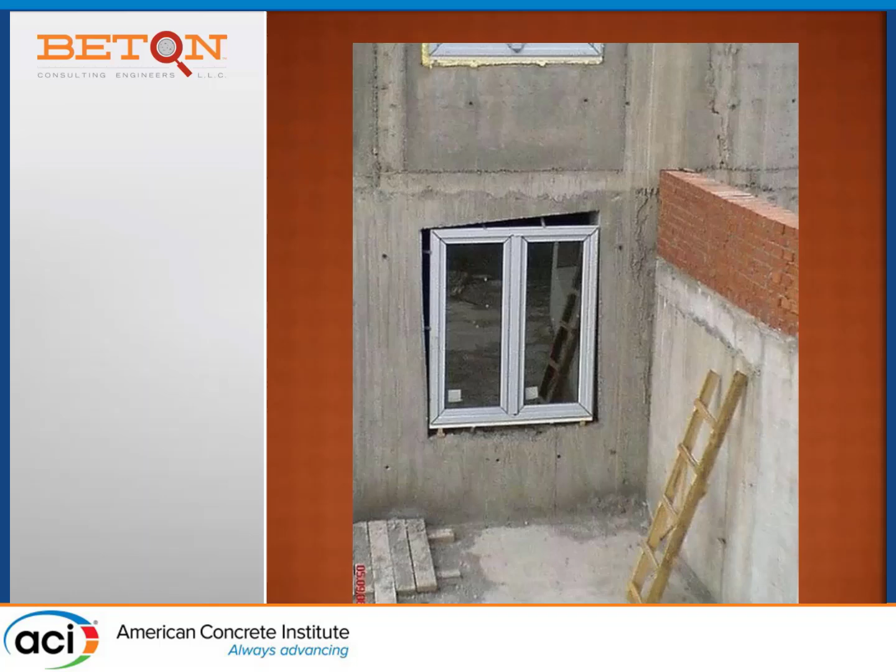And concrete construction is an interesting thing, right? Because we can fix a lot of problems in the field. This is why I no longer run my contracting business, right? Because they make the windows the wrong shape. So we live in a pretty simple world.

And the simple world that we live in is based on specifications. A specification is part of the contract documents. It comes together and clearly tells us as the contractor, and communicates from the designer to the installer, exactly what all of the requirements for the construction are.

We then ask for a submittal. The main purpose of the submittal is to make sure that the contractor has read the specification and has responded to it. It also gives us something to do in a couple of weeks, which is always good.

And then a testing lab is hired to check, to make sure that what is being provided to the site is in fact what was in the submittal. And there are no problems, and so everything is great, and I will talk to you next year, right? Works just like that.

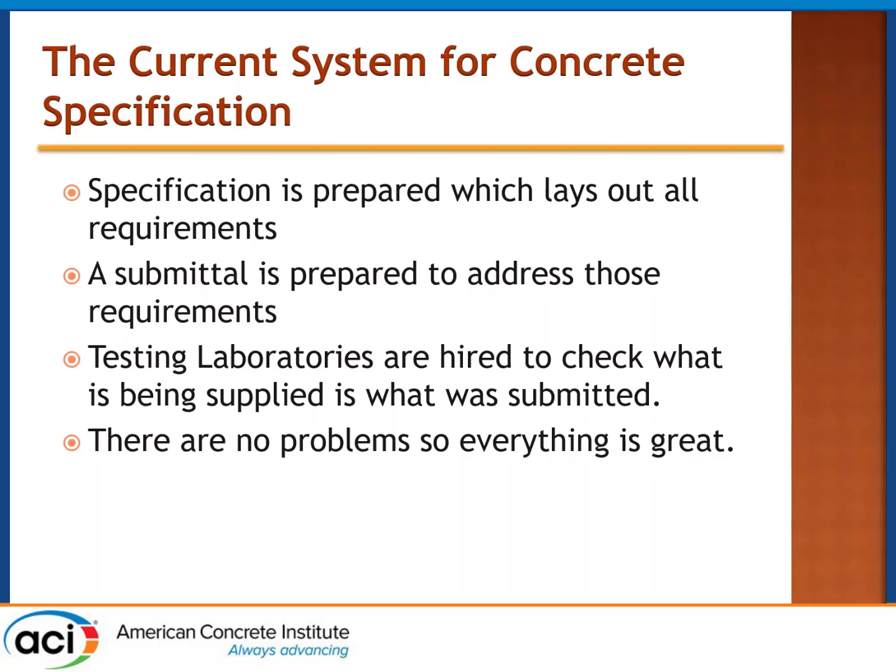We have an interesting situation where, as things are changing, we are getting a lot of new terms that some of us might not be familiar with. One of them is the global warming potential, GWP, expressed as a carbon dioxide equivalent.

And that's because carbon dioxide is a greenhouse gas. It has different atoms, carbon and oxygen bonded together, and therefore it can store heat effectively. Most of the air around us is made of oxygen, about 21%, and nitrogen, about 78%. Those are two N's or two O's. That doesn't store heat. But the other gases in this room, probably in order of size, water, which is H and O, carbon dioxide, which is C and O, and methane and various other hydrocarbons, which are C and H, all of those will absorb light, incident radiation, and turn it into heat.

So when we have a global warming potential, so-called greenhouse gases, they heat the atmosphere up. And we know this is the case. We know that if it wasn't for greenhouse gases in the air, particularly water, the Earth would be considerably cooler than it is today. And that's well known. It's been well established long before the politicians got involved.

But now we're going to determine the quality of our concrete not based on how well it sets, and or how much it costs. We're also going to have another measure of quality, which is its global warming potential. And so we are going to see a lot of work done

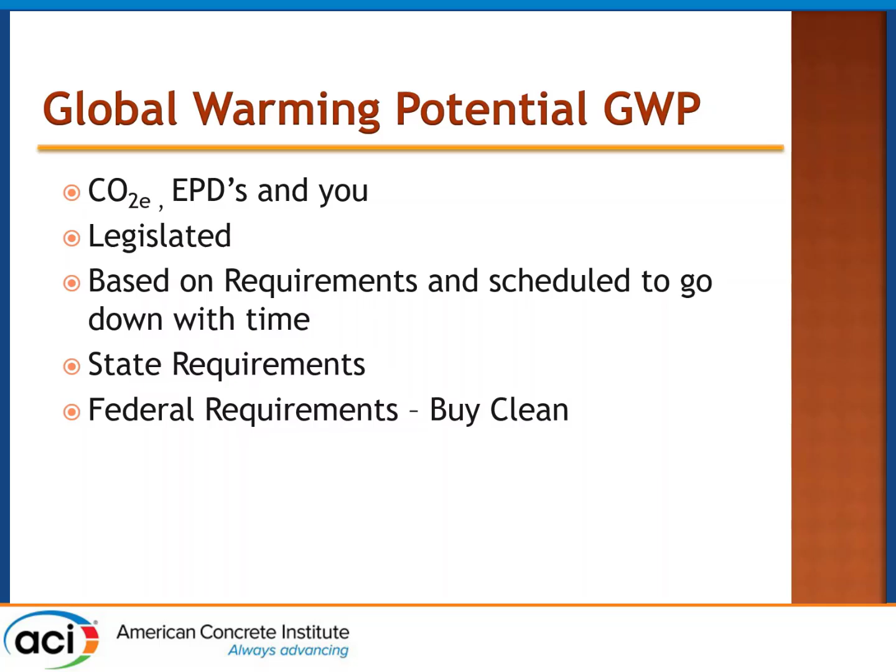And so there are state requirements, there are federal requirements. They are going to be based on global warming potential, and they are scheduled to go down with time. In fact, that is exactly what is promised. So let's take a look at what some of these things look like. In California, I put California in there on purpose.

California, that's right, the home of the gold rush. They have no requirement for concrete, and that's because they're concerned that no mill in the United States will be able to provide cement, since they'll be able to get much lower cement GWP from overseas—because I'm sure that's what really happens.

But that having been said, they do have a requirement for steel reinforcement. You're allowed to emit 1.06 metric tons of CO2 global warming equivalent per ton of reinforcing steel. I put that in on purpose because it's a relatively large number compared with, say, New York State.

New York State has published requirements. They're optional now, becoming mandatory in January 2025, and will be reduced further by January 2027. They've listed compressive strengths, including the very accurate 4,999 PSI, which we're all laughing at now, but since the difference between 4,999 and 5,000 is only about 24 kilograms per cubic meter, you can be sure there will be a lot of 4,999 PSI specified. You can see it's going to happen, right?

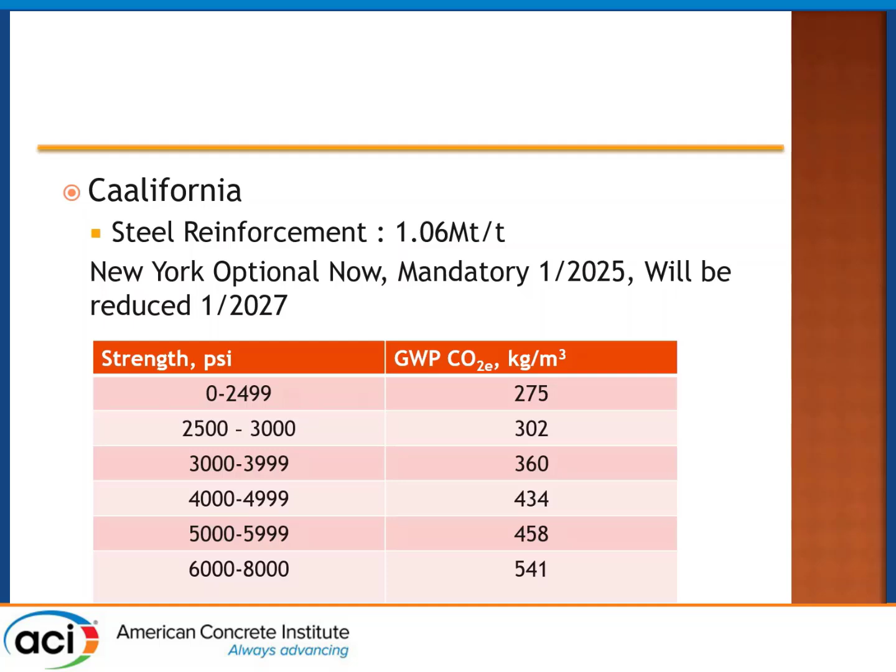But it's getting better. This, by the way, doesn't tell us what the basis is. However, the U.S. General Services Administration, as part of the Inflation Reduction Act, has low embodied carbon concrete requirements. Here you can see less than 2,499, then 3,000, 4,000, and greater than 7,200. We have three numbers: the top 20% limit, the top 40% limit, and the better-than-average limit.

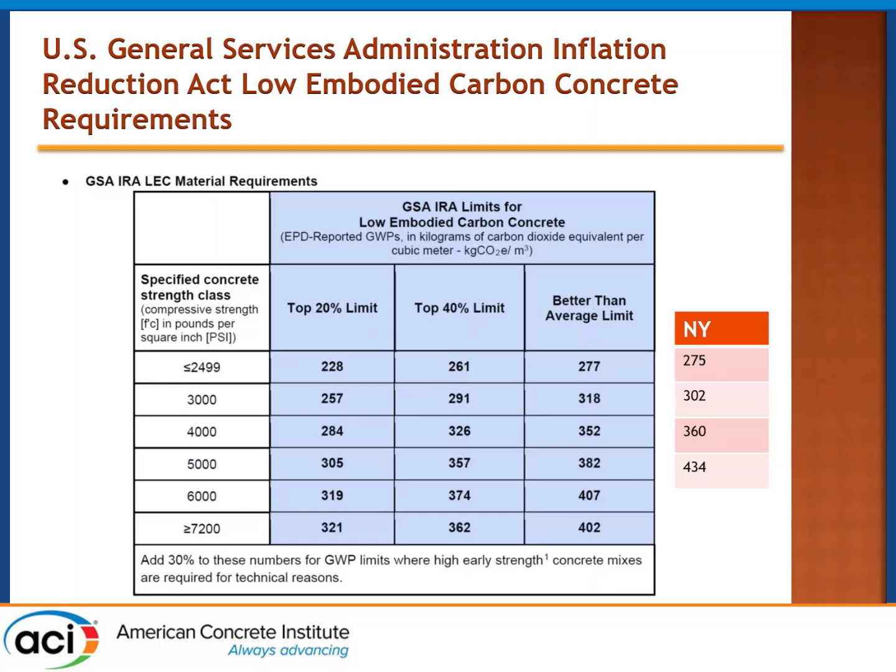All of these numbers come from the NRMCA survey for the East Coast, the Northeast region, and further, it allows an additional 30% for high early strength. That's required to have a technical justification, but no description of what that is. So these are representations of the owner that are put together, and very frequently we are required to construct what the owner says that they want.

One of the difficulties we have is that it's very easy to concentrate on one aspect of the design and not others. For example, a problem occurs where you're packing tennis balls in tubes. Anyone play tennis ever? So you can buy a sleeve of tennis balls. How many tennis balls do you get in a sleeve? Typically three. So an engineering problem could be, how could we put more tennis balls into a sleeve without increasing the size of the sleeve?

We've changed most Portland cement in North America to contain some amount of finely divided limestone. We're seeing problems for users of that material, not so much in terms of strength, but in terms of setting, finishability, and sometimes strength gain if the temperature isn't the balmy 72 degrees presented in all engineering textbooks.

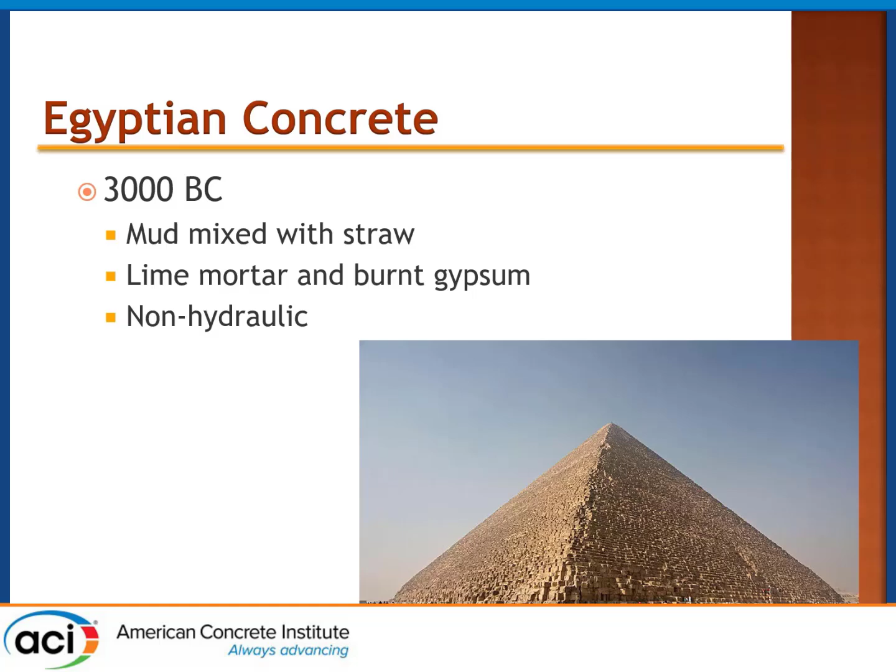Long before we had Portland cement, we could make Egyptian concrete. We could mix mud with straw and some lime mortar, maybe some burnt gypsum, put it all together. It'll be non-hydraulic. And those of you that have been paying attention to geopolymers for a while will know that, in general, there is a very well-established and multi-investigation now evidence that the pyramids, you don't need to worry about how did they cut the stones and how did they drag them across the desert, because they cast them all in place.

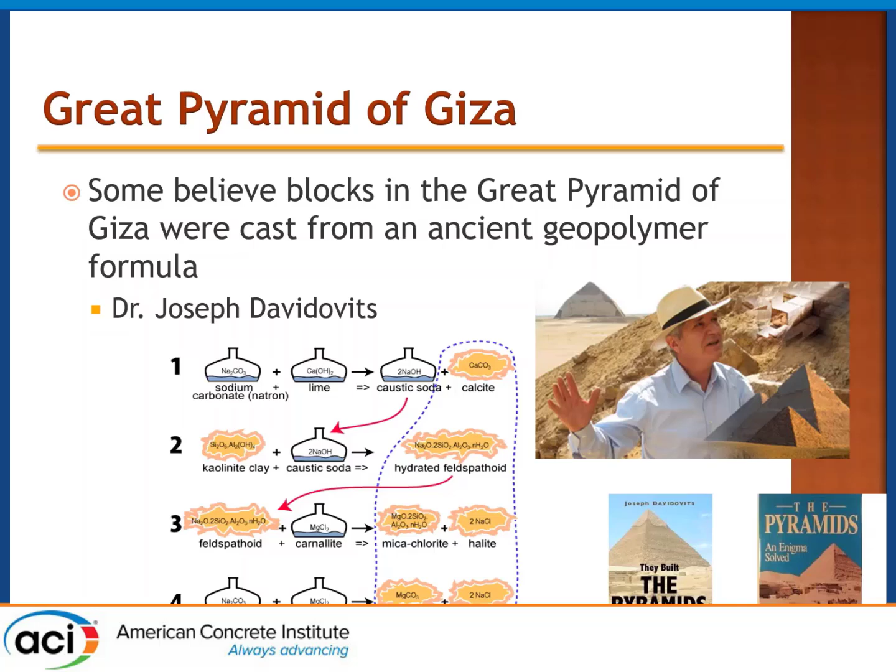This is a set of recipes courtesy of Dr. Davidovits, and how you make pyramids using materials that were known to the Egyptians. Natron is a source of sodium, and halite is rock salt. The Romans made concrete without any Portland cement clinker, so they were fine as well.

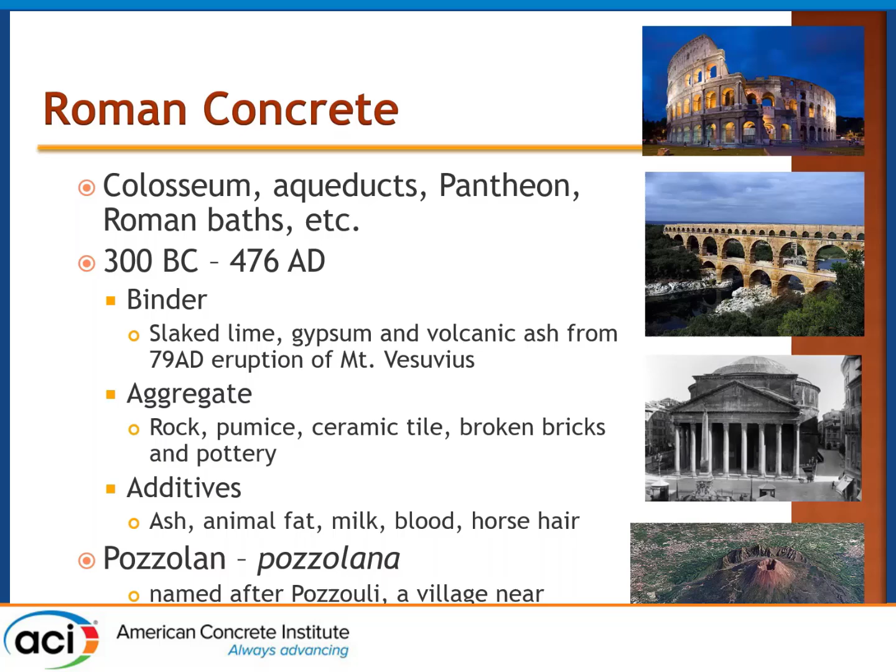They rammed their materials in place. We even talk about pozzolans, a word that they were familiar with. And if we read Vitruvius's book of architecture, his 10 books of architecture, one of them talks about the amazing sand on the slopes of Mount Vesuvius, when mixed with lime, will harden underwater. And we may make fun of the poor Romans, but this is a piece of Roman concrete taken from the port of Trajan in Naples. And it looks an awful, it's gap graded, which means that they had the tarantula curve, but also that it has been rammed into place, and it looks for all the world like modern concrete.

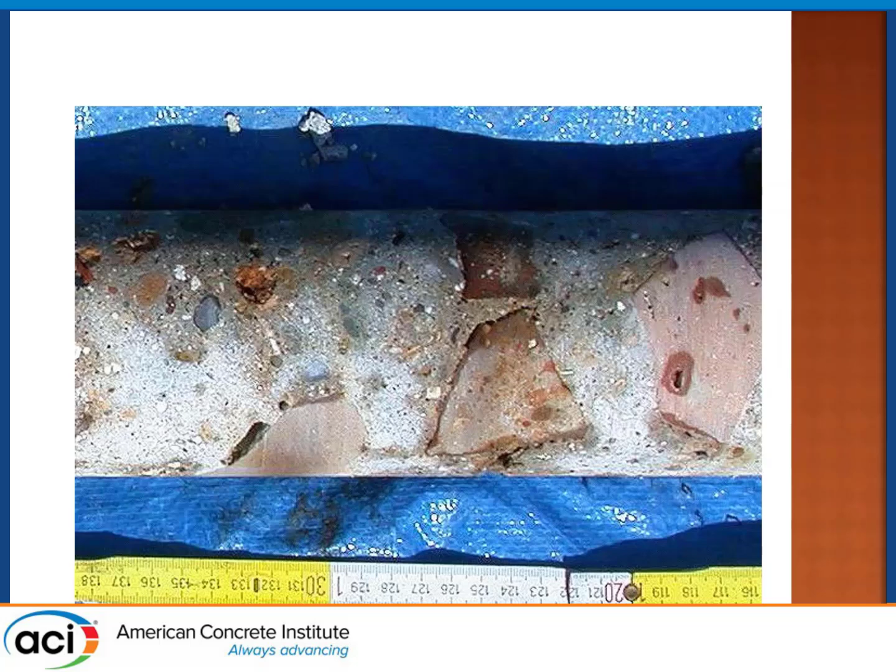And I've been making concretes with very little global warming potential for a long time. This is a piece of concrete that Dick Staley, the late Dick Staley, and I worked on many, many years ago. You can see all the recycled aggregate in there, causing all kinds of problems. These concretes have almost no non-recycled material in them. They still have global warming potential because you still have to haul the material to the plant and then haul the material from the plant to the site. But these have been used in practice.

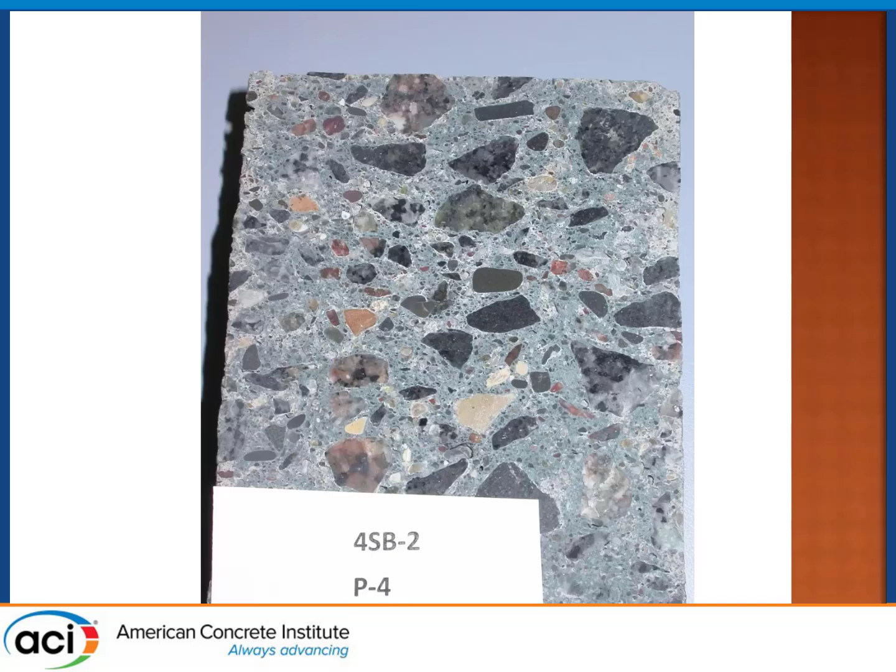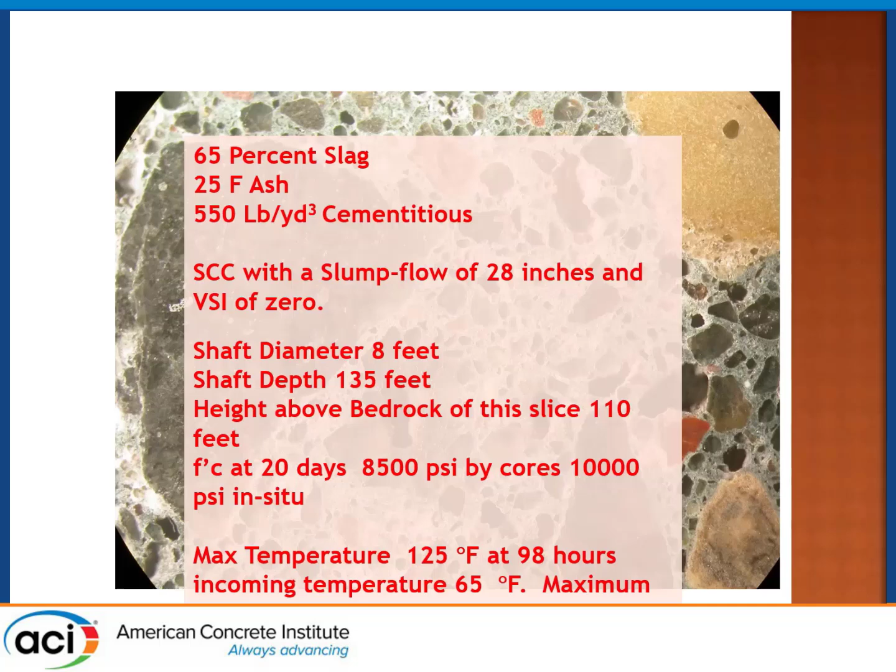And so it was designed to have a lot of other engineering properties. So rather than just meeting the strength requirement, a la the cut up tennis balls, we had to meet a temperature requirement and a durability requirement. And so I thought it would be interesting to look at some more typical concrete mixtures along with these very low green global warming potential mixtures and see how they're doing.

So I found there's a source, Circular Ecology, has an online calculator. So it is supposed to calculate what the global warming potential, CO2 equivalent, is of your concrete mixture if you put a bunch of data in. I had it hauled 15 miles. It's the same slump, similar strengths in the designed to be 4,000 psi air entrained concrete, and 600 pounds of material per yard. And this is what I came up with.

The first mixture is 15% Portland cement by mass. It's wonderful stuff. It does not emit very much CO2 emissions, and if you cure it properly, then you're going to be just fine. The second mixture is a straight cement mixture, perhaps for a slab on grade, and the third one has a 25% slag replacement.

The global warming potential is calculated in kilograms per cubic meter below, and you can see that I can make really low, 113, that's super low. That meets everybody's requirements. So using straight cement, which many floor finishes require, does not meet those requirements. And further, the 25% slag does, but I picked 25% on purpose.

At about 25% slag is where the material starts to behave differently under a trowel. And that has to do with if you've ever taken a slag, granulated slag nodule and placed water on the surface, you'll see that it beads up. It has a Washburn angle in excess of 90 degrees, just like the same way if you wax your car.

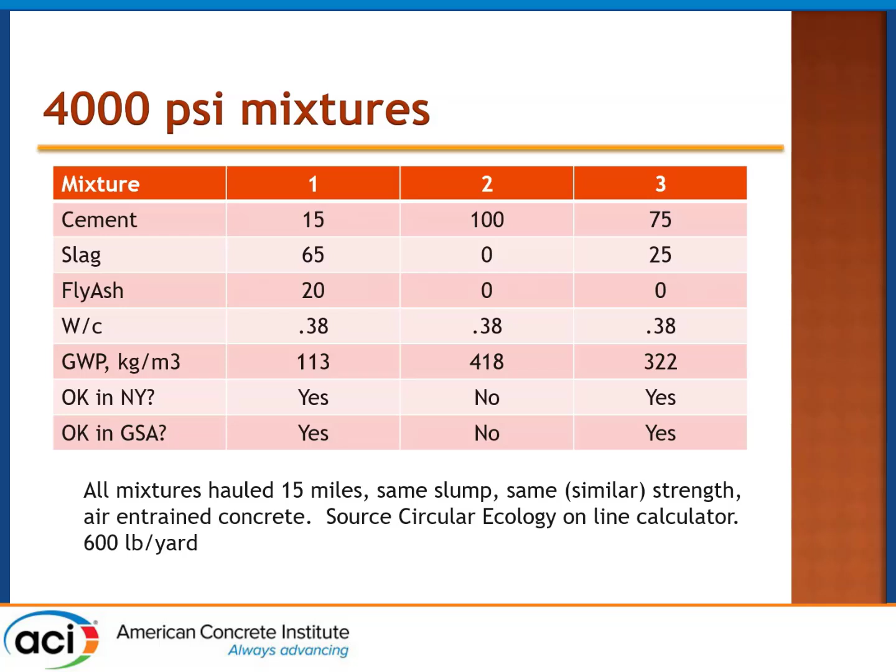That what the concrete looks like is different from what it's going to behave like if you change the cementitious binder enough. This becomes a problem, and guess where this is not written? It's not in the specifications. That first mixture will be 10,000 psi at 20 days. However, it's purposely put up faintly so you don't have to read it.

It requires specialized curing. If you cure it where it is not able to self-stoke, to self-anneal, to heat itself up to about 130 or 140 degrees Fahrenheit, it is not going to behave very nicely for the first 7 to 10 days. So if you're okay with placing today or finishing tomorrow and maybe cutting the joints the day after tomorrow in your floor, that's no problem. We all know that the owner schedule says, I'm using low global warming potential concrete, so you take whatever time is required to get that slab in place. You don't fret, don't worry yourself.

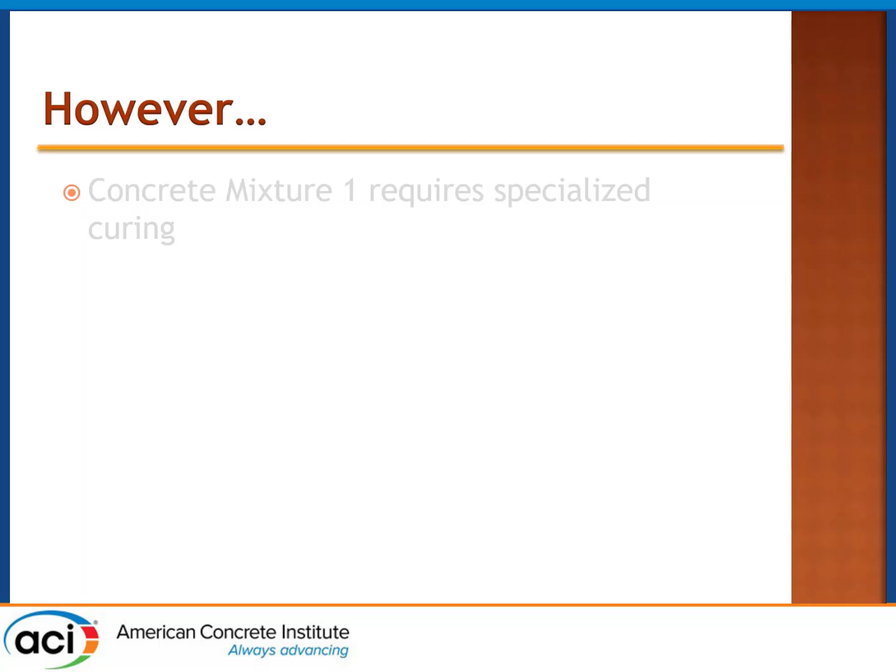It's the GC that says we got to get going, right? And so part of our problem has to do with a similar problem of development of technology that occurred in the 1950s. Many of you may have never heard of Admiral Rickover, the father of the nuclear navy, but he gave a paper once on the difference between paper reactors and real reactors. He stated that an academic reactor or a paper reactor is almost always simple, small, cheap, light, and can be built quickly using off-the-shelf components. That reactor is always in the study phase. It's not been built. And now we have a lot of concrete that people have been talking about.

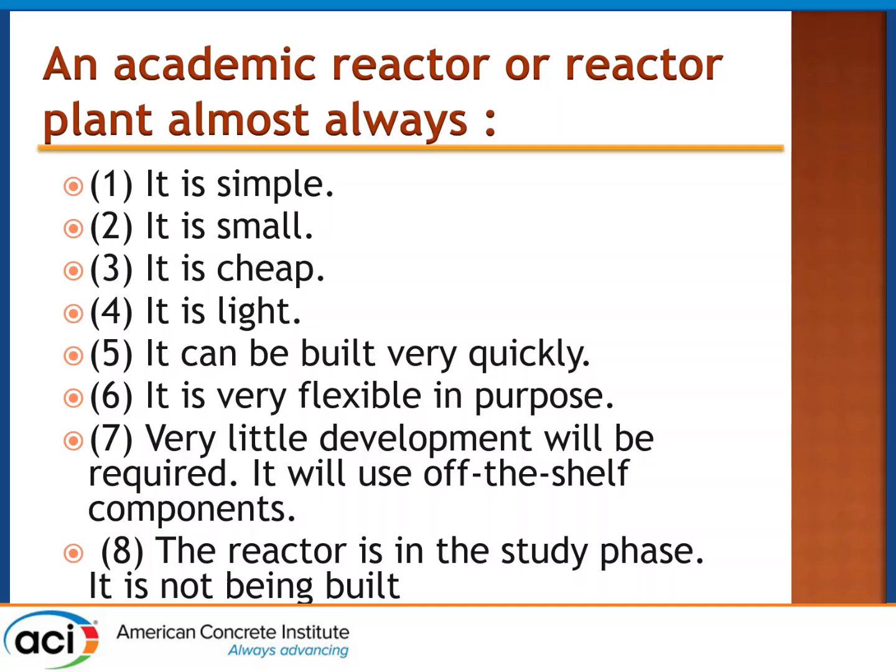In fact, I am the named inventor on one material that has no carbon, no clinker in it at all, and is a wonderful material. It's carbon neutral. However, it's in real production. And what we found, just like Admiral Rickover, is that real reactors, real concrete being built now, is behind schedule, requires an immense amount of development for apparently trivial things. It's expensive. It takes a long time to build.

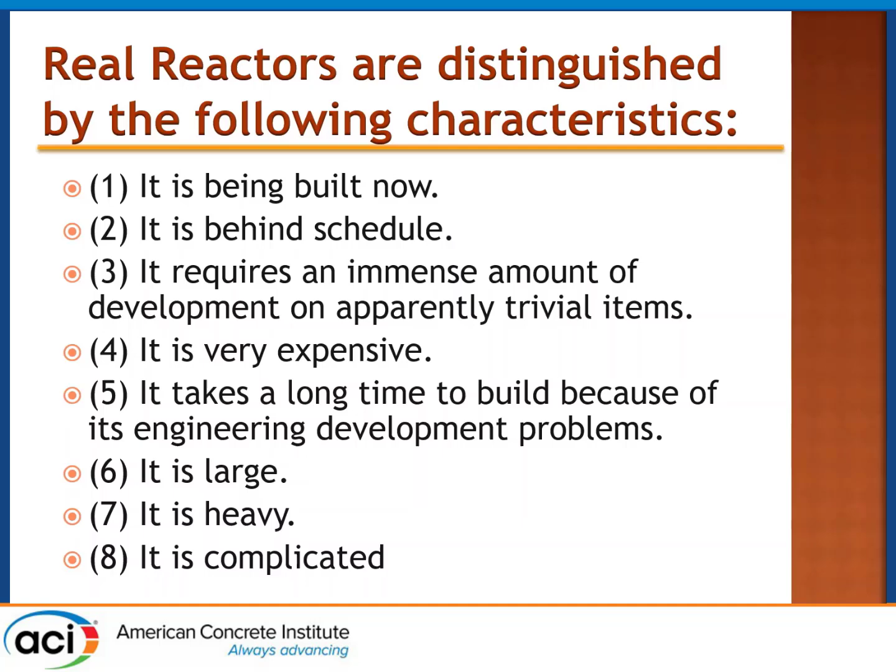It's large, it's heavy, it's complicated. And this is where we're heading, because as we develop new materials that don't have any clinker in them at all, we're going to look back wistfully for the days when we had type 1L cement. Many of our technologies that we're talking about as serious people, and that you can learn about down in the exhibit hall here, are unproven at scale. We don't know what's going to happen with those materials when we start trying to make them at 200 cubic yards an hour and try to put them down with our conventional plants, conventional equipment, and conventional people.

And the other thing, and this is clear if you read ITG 10, which was published some time ago. In fact, it was published more than 6 years ago because the first chairman of the committee that it spawned, her term is up. There are latent defects that we don't know about. If we were in this presentation and it was 1924, we wouldn't know about alkali silica reaction. It wasn't really well known at that time. Cement set very slowly, so we didn't need to worry too much about rapid strength gain or rapid curling.

And so the takeaway from this presentation is that low global warming potential concrete is available right now, and it can be made to be as close to zero or negative as you want, but it's not the same. And until we can change our documents, our construction methods, our codes, and our specifications to reflect the fact that it's not the same, and that we push the training in both directions, it has to go backward for the structural engineers as well as forward for the contractors, we are going to have problems. So thank you so much for the time.